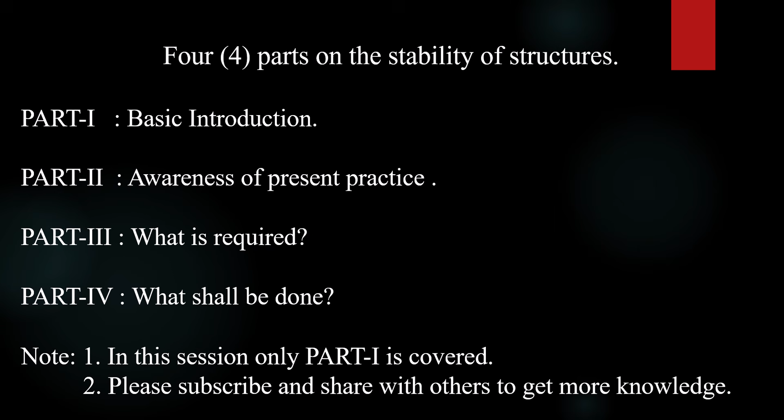Part 1, basic introduction. A very important subject and interesting too. What is a structure? In civil engineering, a structure is built to serve its intended purpose. It may be a building, road, bridge, dam, irrigation structure, or any other related element.

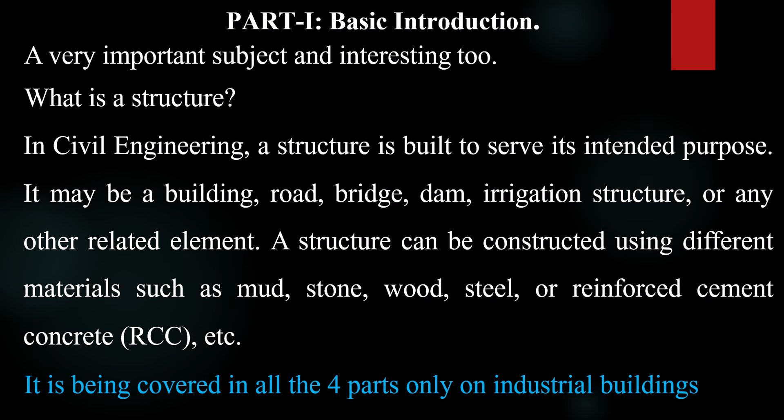A structure can be constructed using different materials such as mud, stone, wood, steel, or reinforced cement concrete, that is RCC, etc. It is being covered in all the 4 parts only on industrial buildings. Life of a structure. It is the period of a structure for which it has been designed and constructed to function well for the intended use throughout that period.

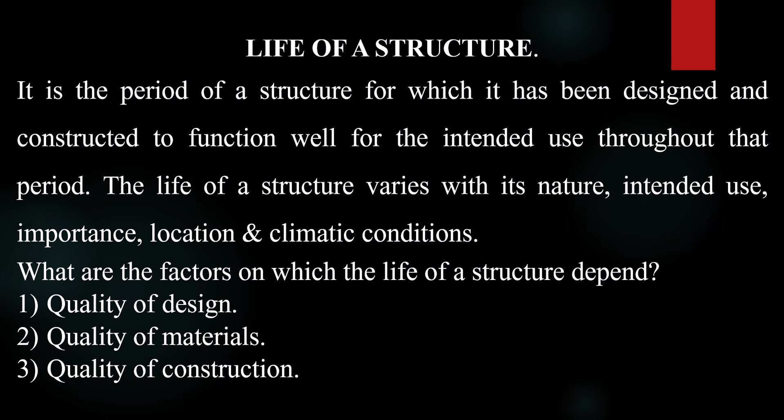The life of a structure varies with its nature, intended use, importance, location, and climatic conditions. What are the factors on which the life of a structure depends? Quality of design, quality of materials, quality of construction, quality maintenance. More precisely, it is the quality of persons involved in all these.

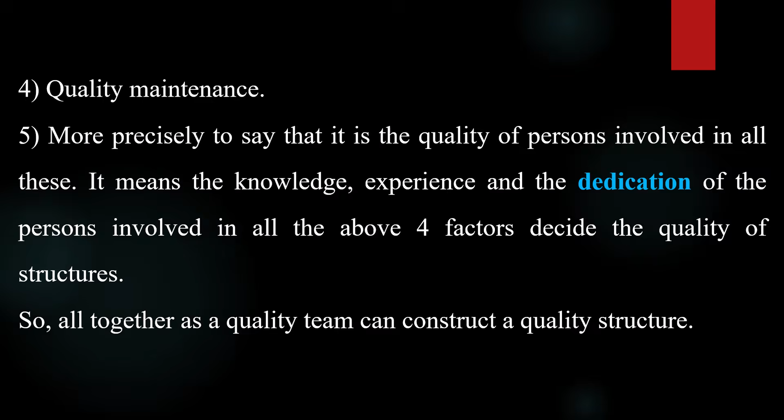It means the knowledge, experience, and the dedication of the persons involved in all the above 4 factors decide the quality of structures. So, altogether, a quality team can construct a quality structure. Quality of a structure. How to define? It is a structure with 0 defects.

It is the structure which fulfills or exceeds all the needs, expectations, aspirations of the user. Quality is the fitness for the purpose. Quality is the adherence to the required standards in design, construction, and maintenance, etc. That is how the quality can be defined in so many terms.

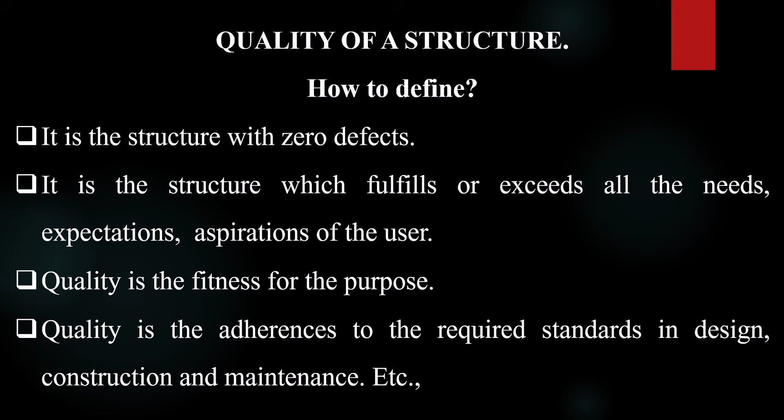Health of a structure. What is the health of a structure? It is the strength, stability, serviceability, and performance, that is physical condition to perform well against environmental conditions of the location and all the loads and forces for which it is designed.

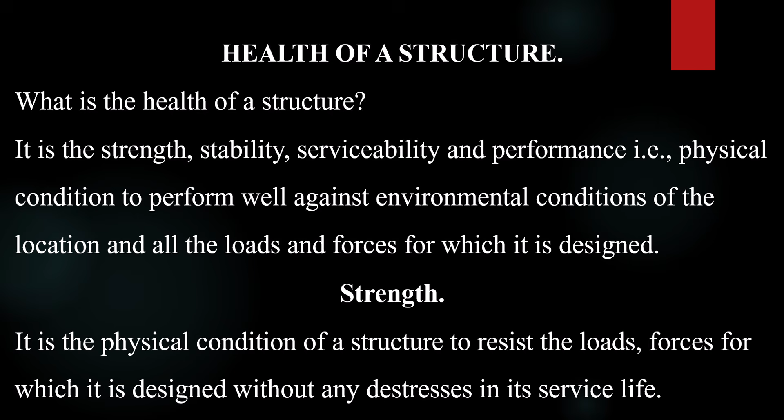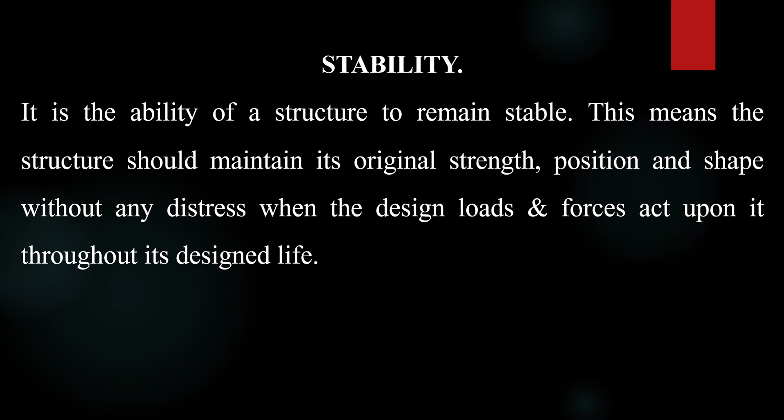Then what is strength? It is the physical condition of a structure to resist the loads and forces for which it is designed without any distresses in its service life. Stability. What is stability? It is the ability of a structure to remain stable. This means the structure should maintain its original strength, position, and shape without any distress when the design loads and forces act upon it throughout its design life.

Serviceability. It is the ability of a structure to serve its intended purpose throughout its design life without any distress, discomfort, damage, or inconvenience to the users, even if it possesses adequate strength and safety against collapse. Stability ensures the strength of the structure to resist the loads and forces acting upon it, whereas serviceability ensures its good performance and comfort during its normal usage.

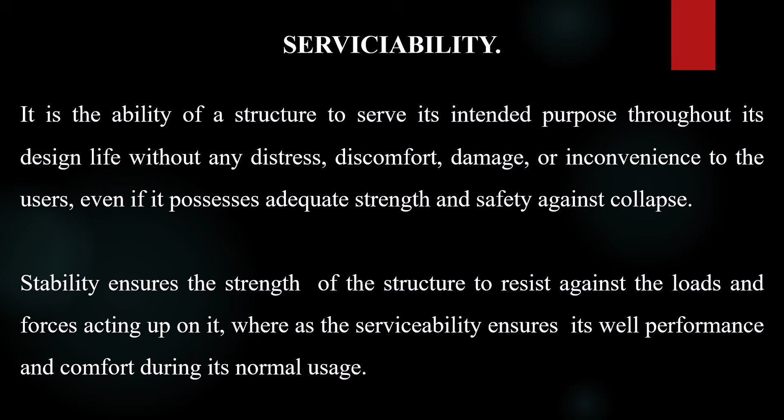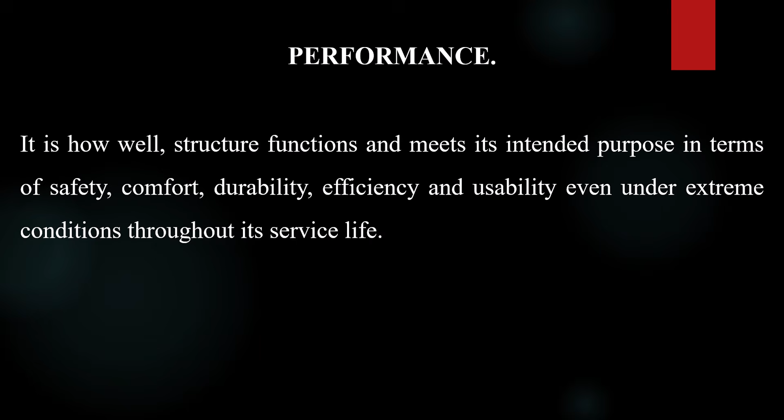Performance. It is how well a structure functions and meets its intended purpose in terms of safety, comfort, durability, efficiency, and usability even under extreme conditions throughout its service life. Quality of design. Quality design means designing a building or a structure for its intended use on par with standards, economically viable, aesthetically good, safe, well-functioning, and user-friendly.

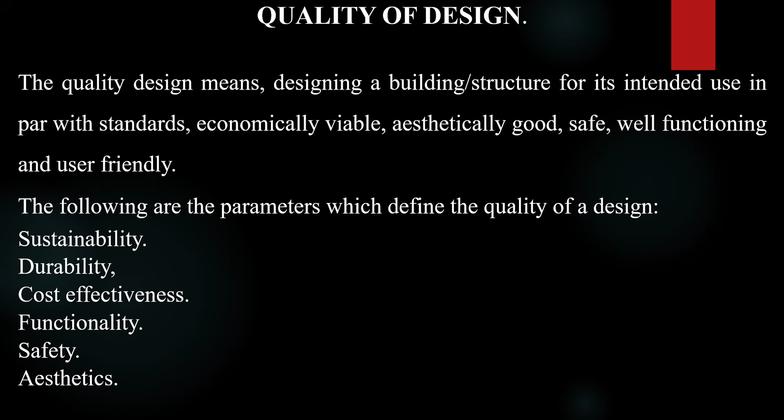The following are the parameters which define the quality of a design: sustainability, durability, cost effectiveness, functionality, safety, aesthetics. All these factors decide the quality of design. Quality materials. Most of the factors like sustainability, durability, safety, and performance mainly depend upon the quality of materials used to build a building or a structure, in addition to the quality design.

Many times, the quality of materials defines the cost effectiveness. It is obvious that quality materials are costlier than usual conventional materials. So, quality is directly proportional to the cost of materials. However, in these modern days, the challenge is to get better quality materials at lower cost. This is how several innovative materials have come into the market.

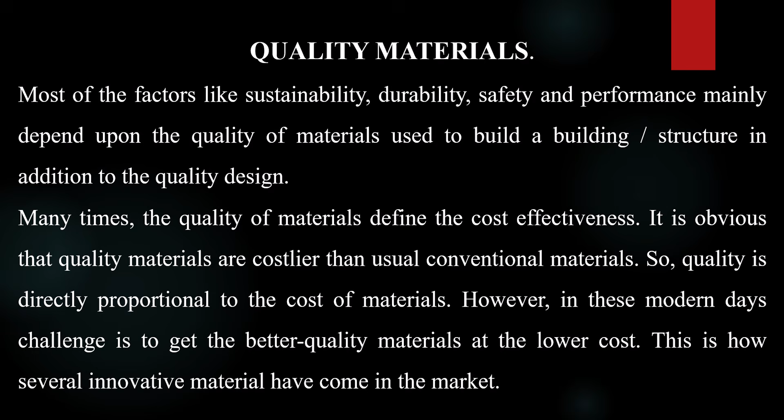Quality materials. Therefore, one should be aware and update his or her knowledge looking at the recent developments in science and technology. Quality construction. It is not enough to get a sustainable and durable building only having quality design and quality materials. The construction process plays a crucial role in getting a stable, safe and durable building. Quality construction involves the following.

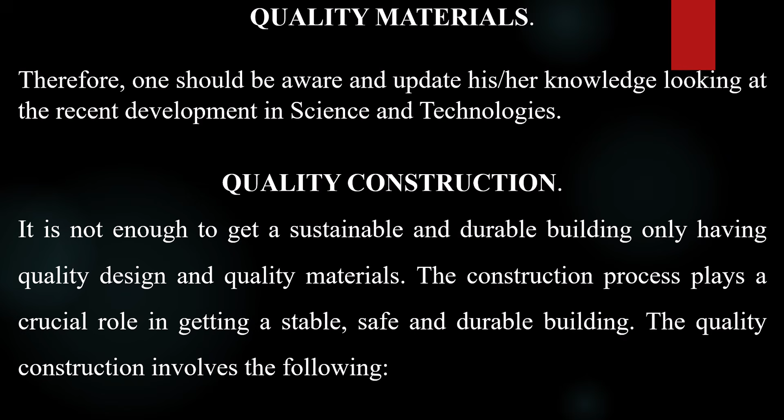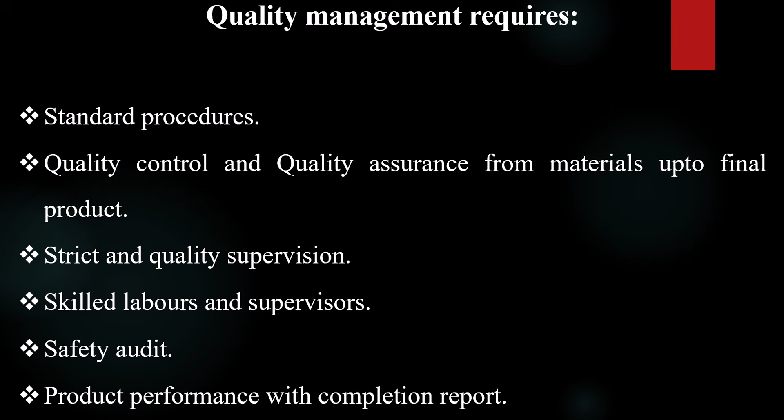Quality management requires standard procedures, quality control and quality assurance from materials up to the final product, strict and quality supervision, skilled laborers and supervisors, safety audit, product performance with completion report.

Quality maintenance. The maintenance of a building plays a vital role in achieving sustainability, durability and functionality. In many cases, more importance is given in the beginning to quality planning, quality design, quality materials and quality construction, while neglecting a very important aspect, that is quality maintenance.

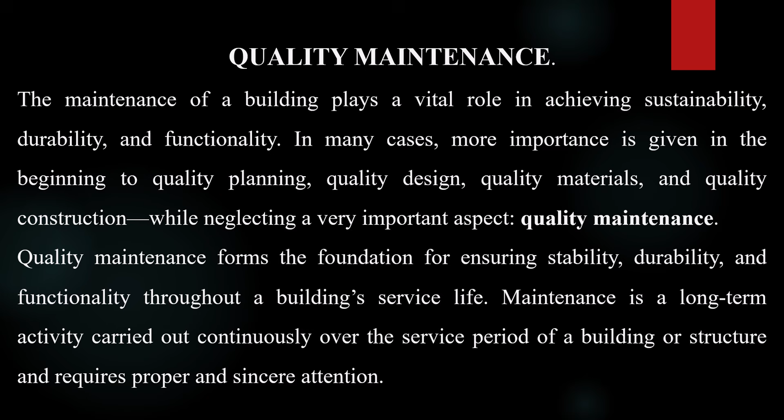Quality maintenance forms the foundation for ensuring stability, durability and functionality throughout a building's service life. Maintenance is a long-term activity carried out continuously over the service period of a building or structure and requires proper and sincere attention.

Quality maintenance. The maintenance activities are basically classified as below. Routine maintenance, that is day-to-day maintenance. Periodic maintenance: for a specific period the structure will have to be maintained, so that is periodic maintenance. Annual maintenance: every year specific maintenance activities will have to take place, which is annual maintenance.

Seasonal maintenance, that is according to the season. For example, before monsoon and after monsoon, many maintenance activities will have to be taken up, which are very, very important. Situational maintenance. This is not certain, it is very uncertain. If the situation warrants a specific maintenance of a structure or a building, we will have to take up that maintenance immediately.

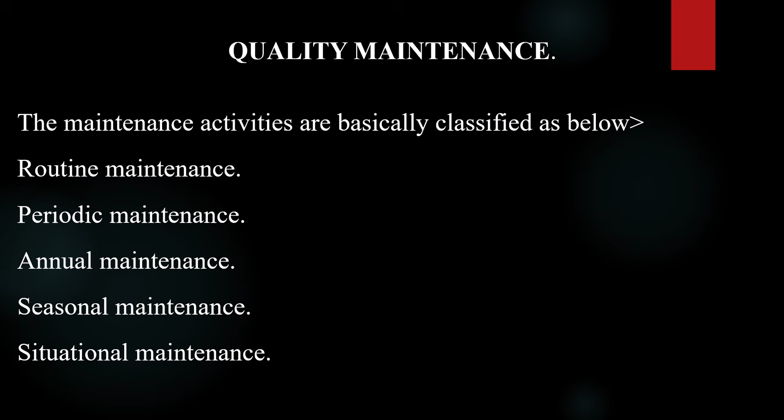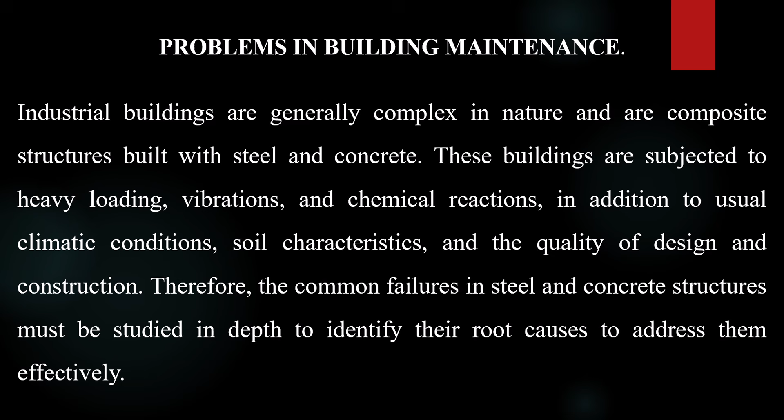Problems in building maintenance. Industrial buildings are generally complex in nature and are composite structures built with steel and concrete. These buildings are subjected to heavy loading, vibrations and chemical reactions, in addition to the usual climatic conditions, soil characteristics and the quality of design and construction. Therefore, the common failures in steel and concrete structures must be studied in depth to identify their root causes to address them effectively.

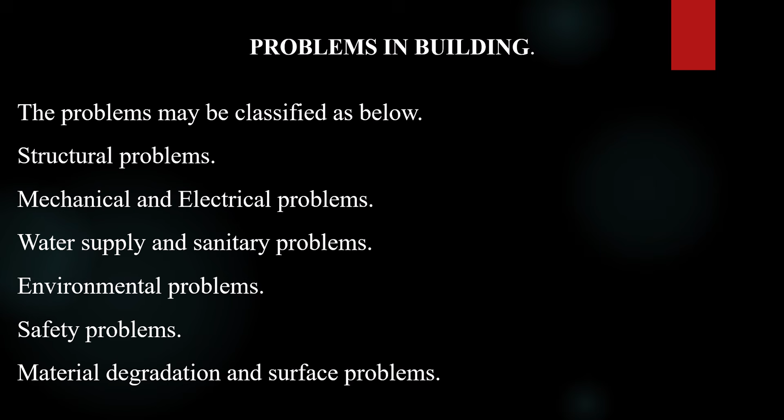Problems in buildings. The problems may be classified as below: structural problems, mechanical and electrical problems, water supply and sanitary problems, environmental problems, safety problems, material degradation and surface problems. So we shall see one by one.

Structural failures. General structural components of a building are footings, columns, plinth or grade beams, lintels, canopy, roof beam, slabs. These are general components. Apart from this, there may be other components also, depending on the design and planning by the architect and the engineer.

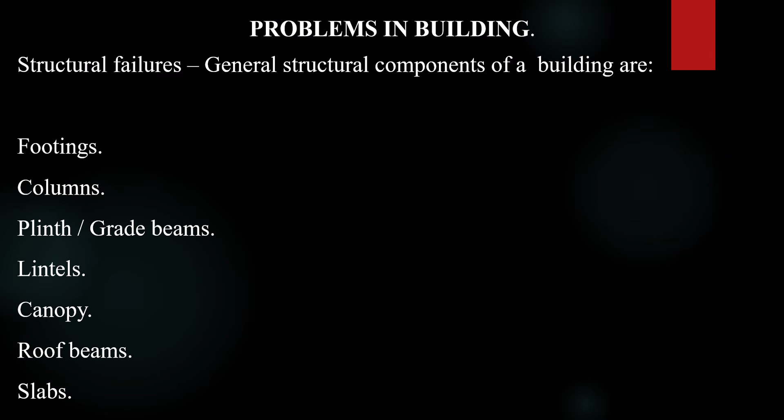Problems in building. Footings. Ultimately, the superstructure load will be transferred to the footings and then to the natural ground beneath. Footing fails when it is not capable of transferring the load safely to the natural ground. Failures may be structural failure. It is because of inadequate thickness or inadequate steel or poor concrete, improper and insufficient curing and overloading beyond the design load.

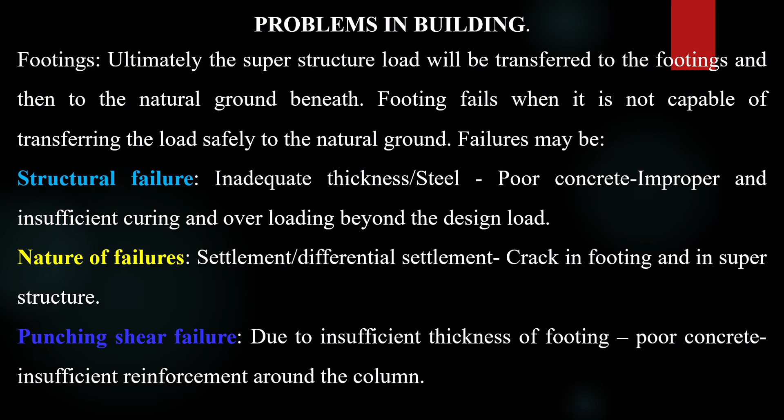Nature of failures. Settlement may be uniform settlement or it may be differential settlement. Cracks in footing and in superstructure. Settlement, if it is uniform, may not affect much, but differential settlement definitely affects a lot and the structure may collapse. The next, punching shear failure. Insufficient thickness of footing, use of poor concrete, and insufficient reinforcement around the column will be the reason for punching shear failure.

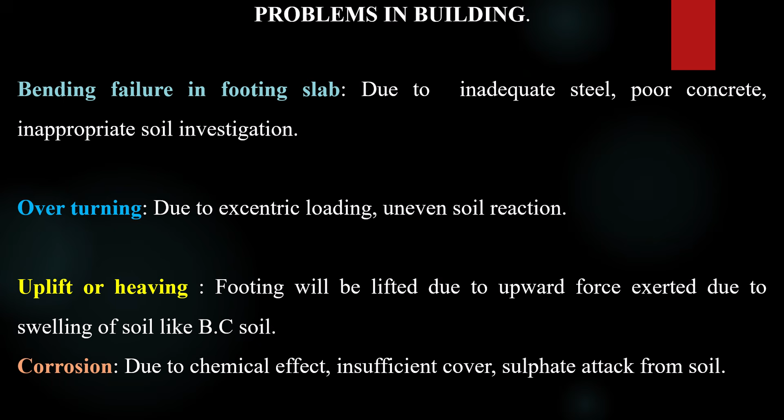Problems in buildings continued. Bending failure in footing slab. Inadequate steel, poor concrete, and inappropriate soil investigation will be the reason for bending failure in footing slab. Overturning. This is due to eccentric loading or uneven soil reaction. Uplift or heaving. Footing will be lifted due to upward force exerted due to swelling of soil like BC soil. Corrosion. Due to chemical effect, insufficient cover, sulfate attack from soil.

Failures in columns. Plumb out of columns. This is because of errors in construction. Buckling of column, especially in case of long columns. Due to heavy loads beyond design loads, insufficient confinement, improper compaction leading to honeycombs, corrosion of steel and erroneous design, eccentric beam-column junctions, etc. And if the slenderness ratio is not properly maintained, that will also cause buckling of columns.

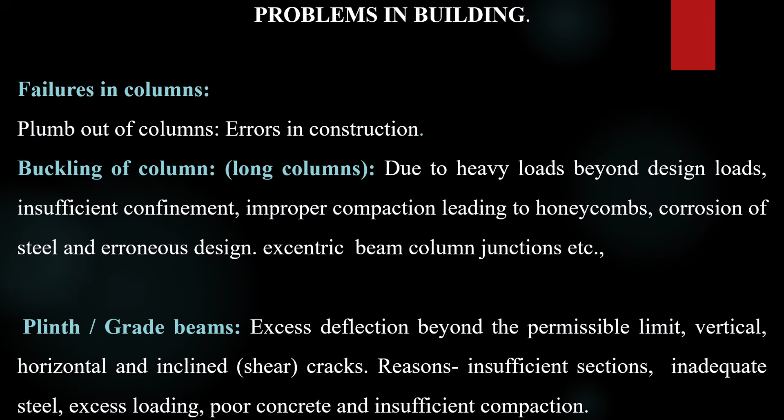Plinth or grade beams. Excess deflection beyond the permissible limit; vertical, horizontal and inclined, that is shear, cracks. Reasons for this are insufficient sections, inadequate steel, excess loading, poor concrete and insufficient compaction. Lintel: excess deflection beyond the permissible limit, and it may develop cracks. The reason for this is insufficient sections, improper compaction, inadequate steel and design errors.

Canopy: deflection beyond permissible limit, development of cracks, spalling of concrete. Reasons for this are erroneous design, improper compaction, improper curing, etc. Roof beams: excess deflection beyond the permissible limit. Cracks will also be developed. The reason for this is insufficient sections, improper compaction, inadequate steel, design errors.

Slabs: common failures are cracks, spalling of concrete, leakage, excessive deflections, corrosion of steel. Reasons for this are improper cover, insufficient compaction, insufficient curing, insufficient drainage system or poor concrete.

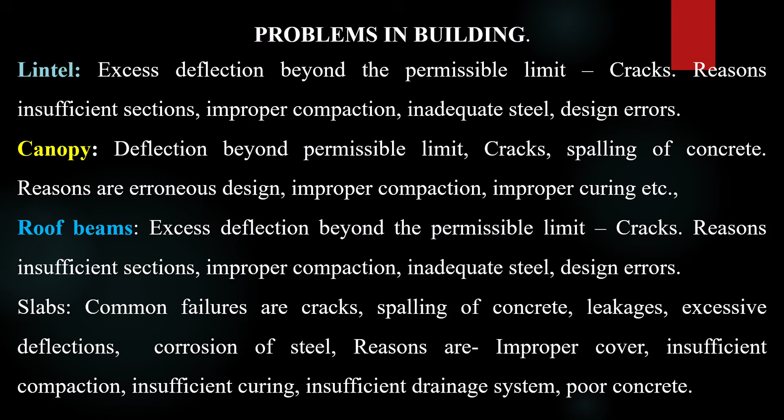Mechanical and electrical problems. Mechanical: corrosion of machines, trusses, steel pipelines, turbines, machine foundations, trolley railings, shafts, couplings, gantries, trolleys, cranes, crankshafts, etc. These will be corroded because of climatic conditions or chemical reactions in the factory.

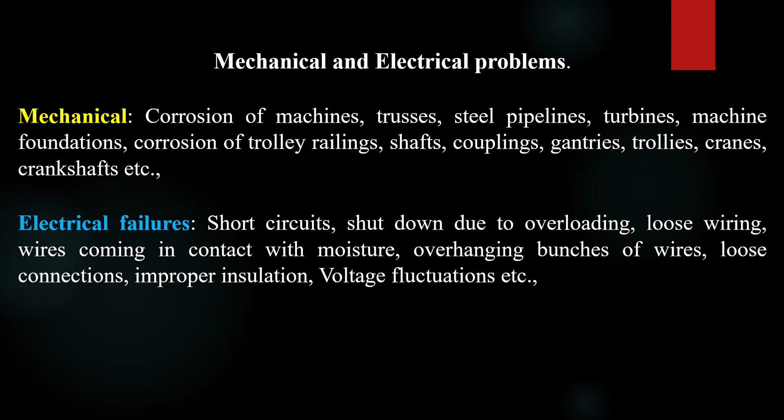Electrical failure. Short circuits, shutdown due to overloading, loose wiring, wires coming in contact with moisture, overhanging bunches of wires, loose connections, improper insulation and voltage fluctuations are the causes for electrical failure.

Water supply and sanitary problems. Water supply problem: the common problem is leakage of pipes due to overpressure, improper joints, use of insufficient pressure gauge pipes, water hammer effect, corrosion in case of steel and GI pipelines. Sanitary failures: common problems are choking of pipes due to debris like plastic, cloths and other non-degradable materials. Bursting of pipes due to pressure beyond the design pressure. Silting of pipes due to entry of storm water through manhole joints.

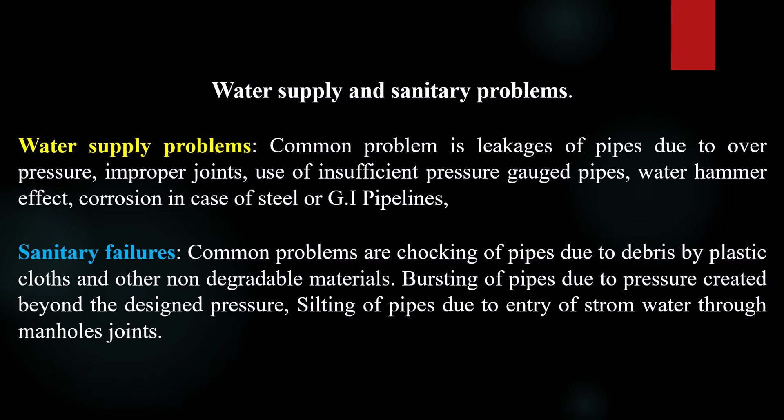Environmental problems. This is due to excess rain, earthquakes, storms, climatic changes, etc., which will cause the structure to fail or deteriorate. Safety problems. This is because of insufficient safety systems for men and materials, untrained safety personnel, inadequate safety awareness programs, improper safety for explosive materials, inadequate safety arrangements, etc.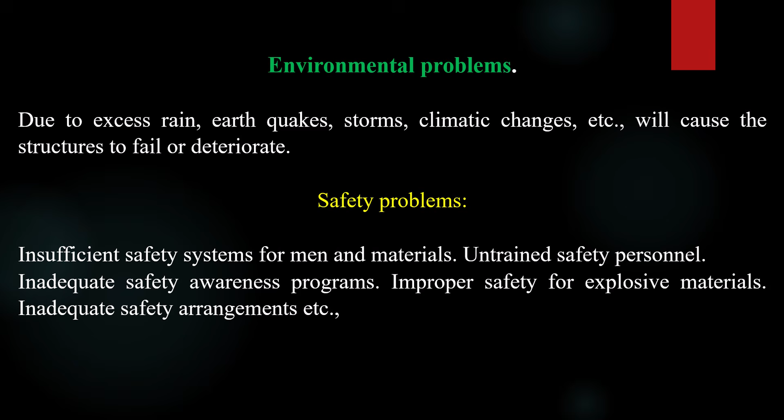Degradation and surface problems. Improper degrading material storage. Surface problems: plaster cracks, fading of paints, undulations of surface, dampness in surface, spalling of tiles, differential settlement in floorings due to which undulations in the tiles, etc.

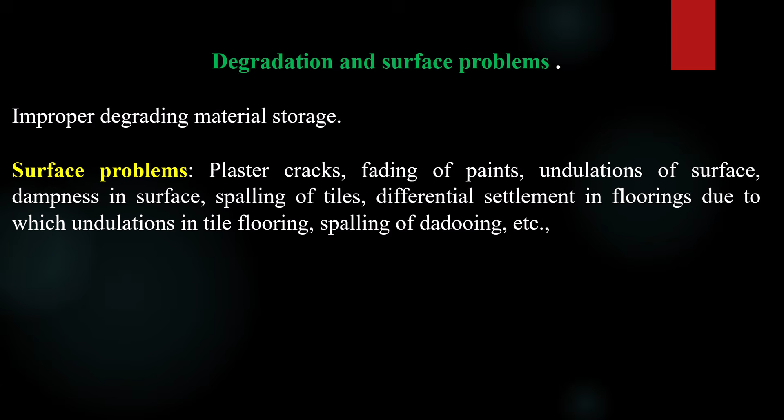Common spots of failures or defects in buildings. Common locations of failures you can observe: generally, there are cracks within the building foundation, cracks in columns, cracks in beams, cracks in slabs, dampness in walls, dampness in slabs, cracks in column-beam joints, leakages in slab joints, choking of sanitary pipeline, leakage of pipe joints in pipelines and sanitary lines, growth of shrubs and grass on slab, chajja, canopy, etc.

Cracks in walls along the concealed electric pipes, cracks in walls at horns of windows and doors. Horns means the extended frame structure of windows and doors inside the wall. Cracks and undulations in floorings, cracks and corrosion in steel structures.

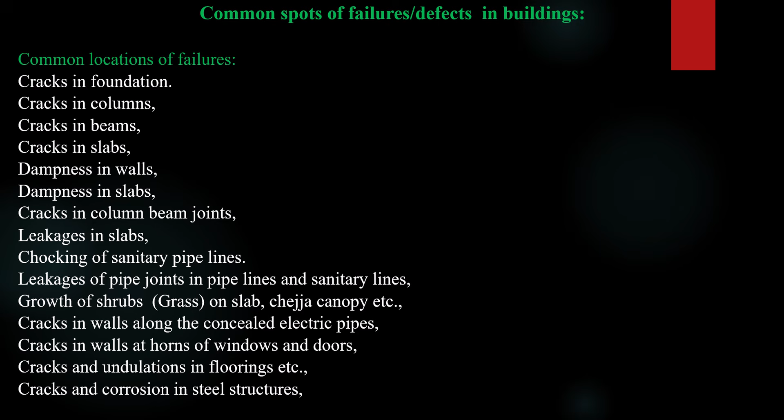That's it. In my next session, I am going to create awareness on present practice in getting a stability certificate.